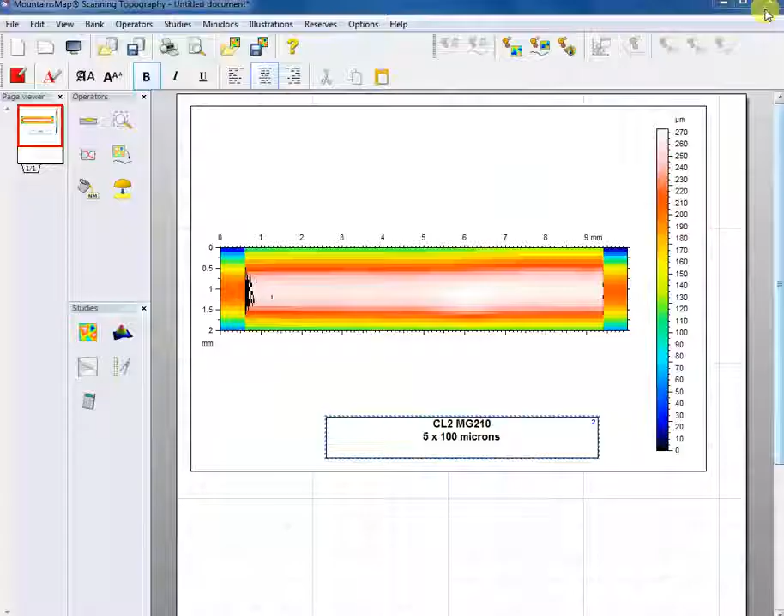It's a little difficult to get an actual thickness on this thinner material. So what we did is we put it across a tooling bar and we applied a little force to it so that when we scan across it, we can get that step height, which will tell us the thickness or the height of that material. So let's go ahead and walk through them.

Here's the first scan. And here you can see what we did is we scanned 10 millimeters by roughly 2 millimeters across that target. We took a data point every 5 microns along the X, and then we would jog it down 100 microns and take another scan. So that's why it looks a little stepped, because we only took a scan every 100 microns.

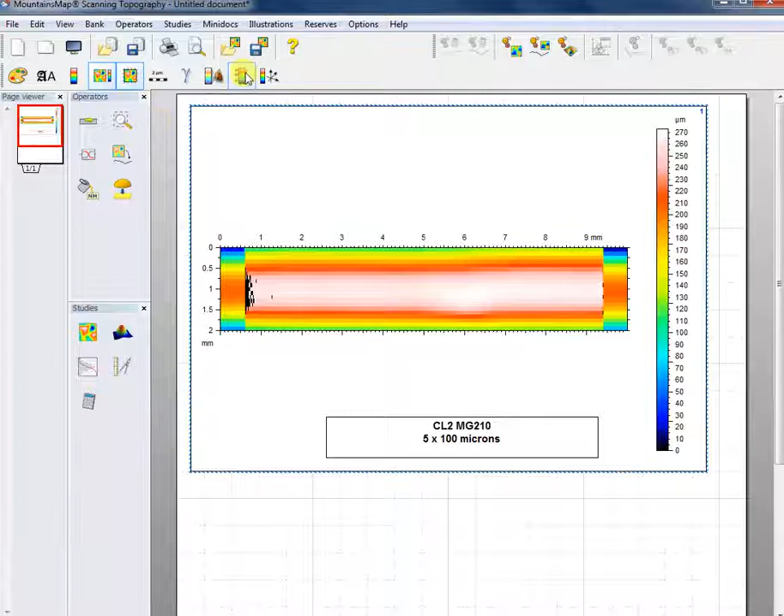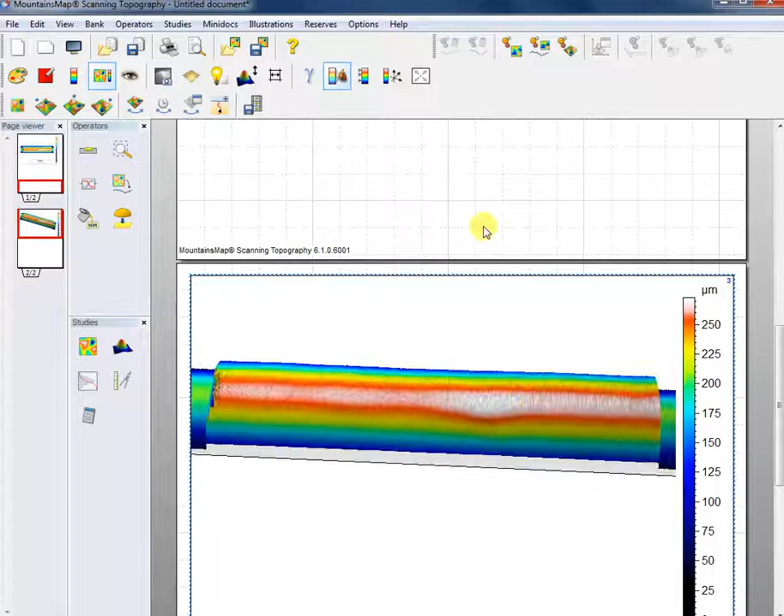So let's go ahead and take a quick look at this where we've optimized the color. And this is a 3D view of that. And let's just put a color scale on there so you can see. So you can tell that we're getting really good data. There's that step height. And if we come back to this, let's take a profile across it, pretty much at the dead top center.

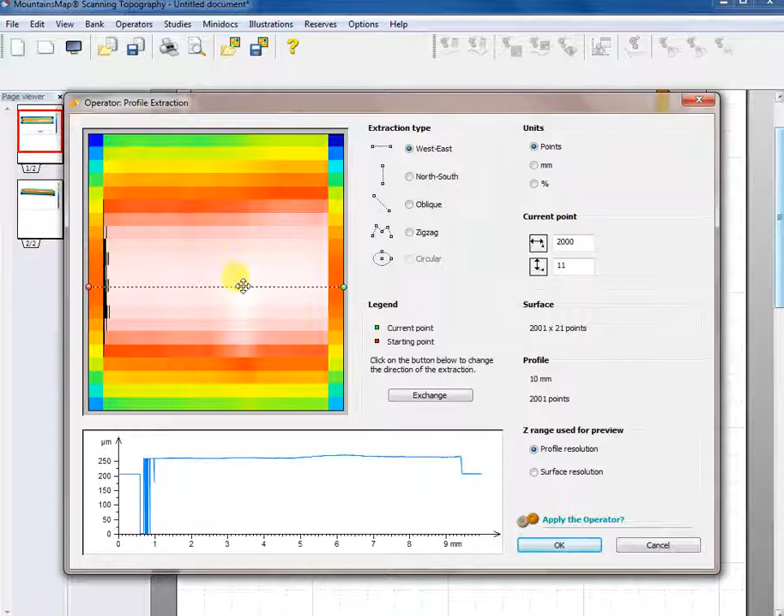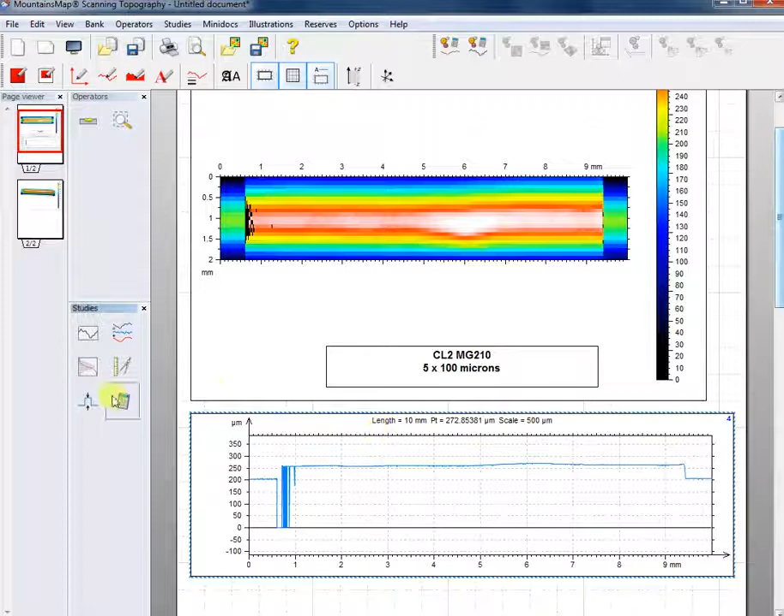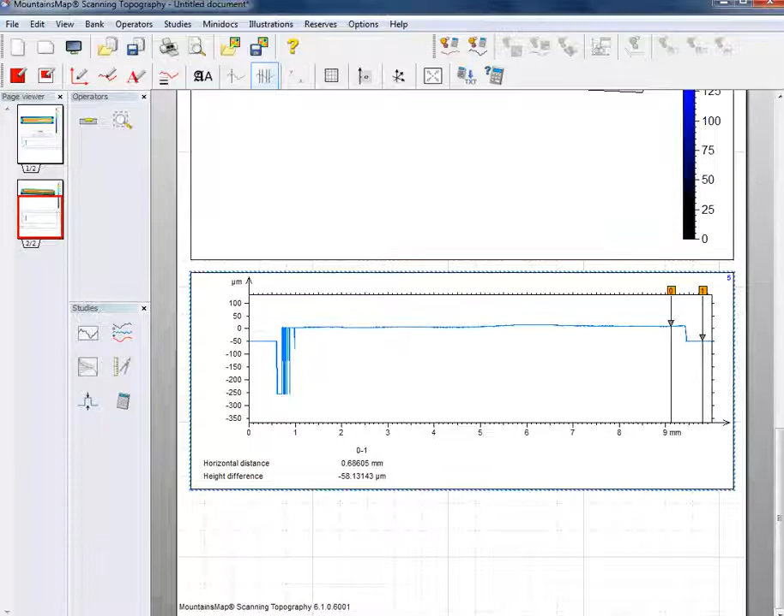And of course now we can see what that height is by doing some basic measurements. And as you can see, we have a little waviness in it. Not sure if that's from the fixture or the material. And so here we're saying there's a height difference of 58.131 microns from that step height. So this was the blue non-LM 2 mil target.

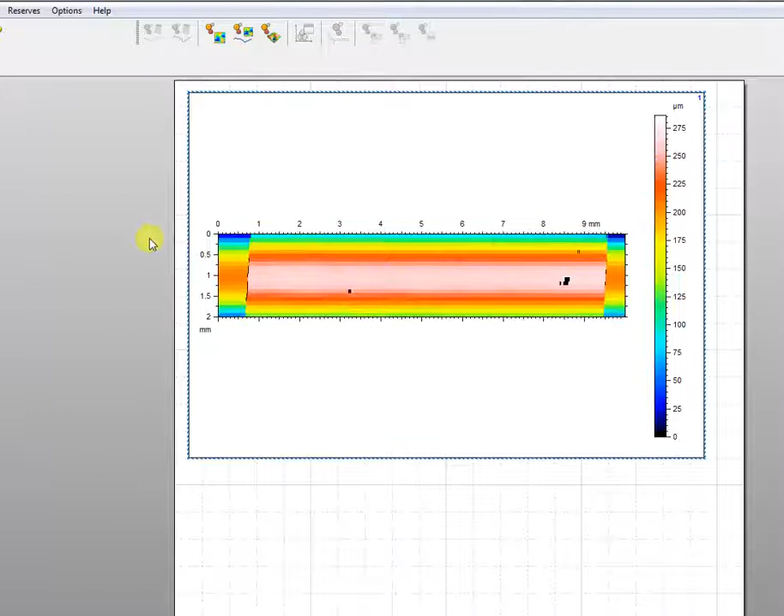That was 210, and let's take a look at 220. I'm just going to walk through these pretty quick, so you should be able to get a good idea of how these are performing. And once again, let's take a look at the same setups. As you can see, it gives you a really good feel for the resolution and the accuracy of the CL2 probes.

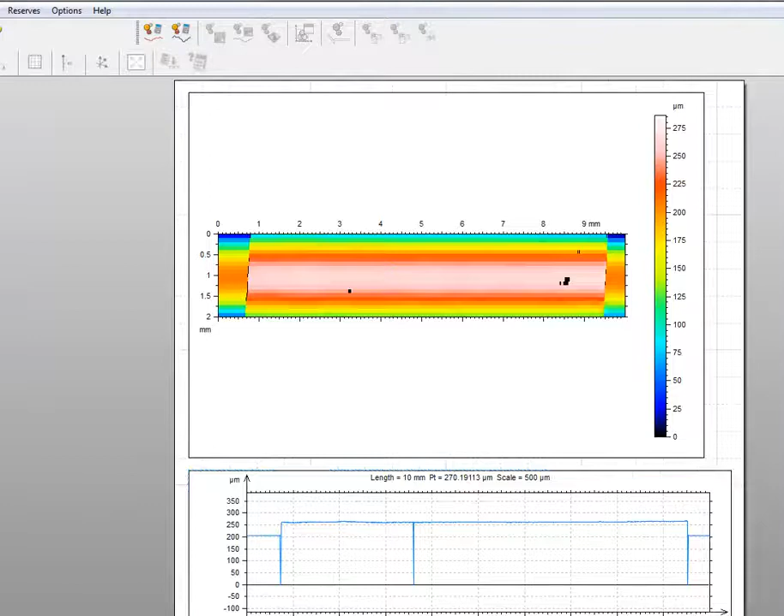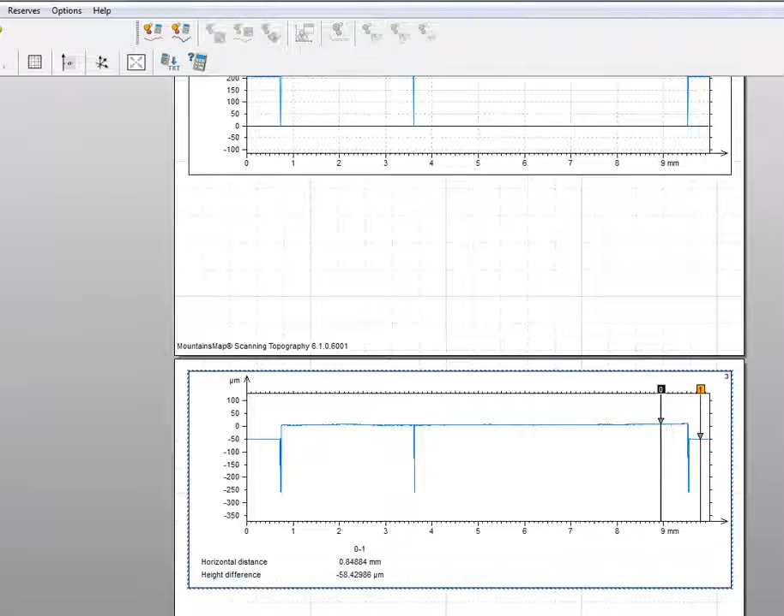And let's take a measurement of this also. And so you can see at this side we're about 55, and here we're at about 58 microns. So that gives you a good idea. It is possible with these tools that we could come in here and level it a little bit more using some software. And once again, that will give us a better feel for that step height or the thickness of it.

Now I'm showing 54.489, and as I move it across to this side, I'm at 50.17. So still a couple microns. And from this side to this side, it's 60. It's also possible that we can zoom this up so you can get a better idea of what this surface is looking like. And this scale is from roughly -2 to 1.5 microns, or that's tenths of thousandths.

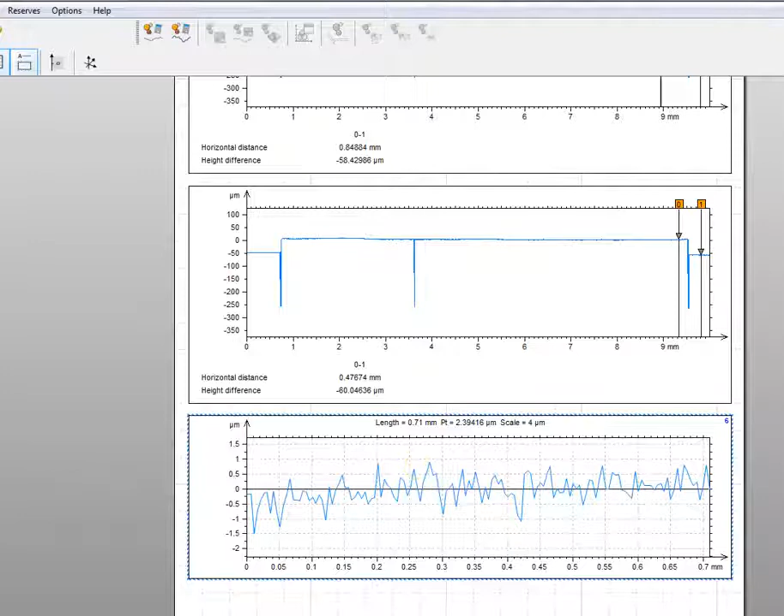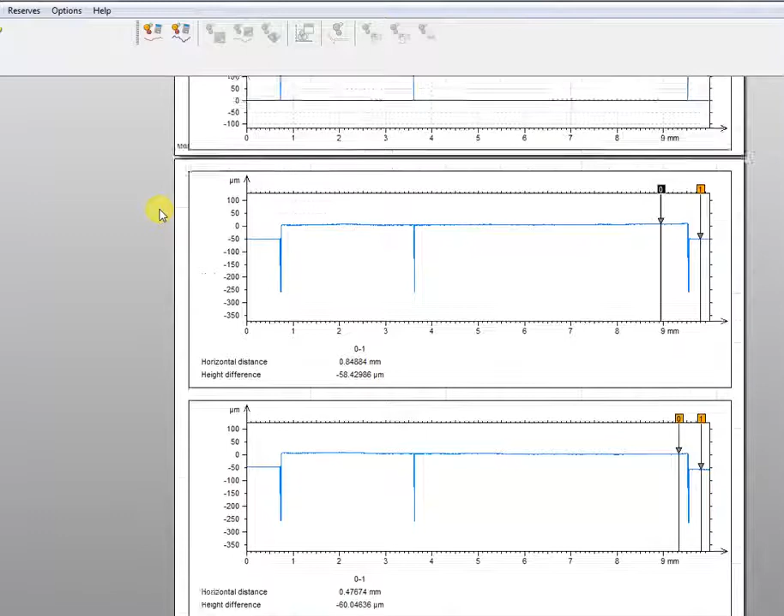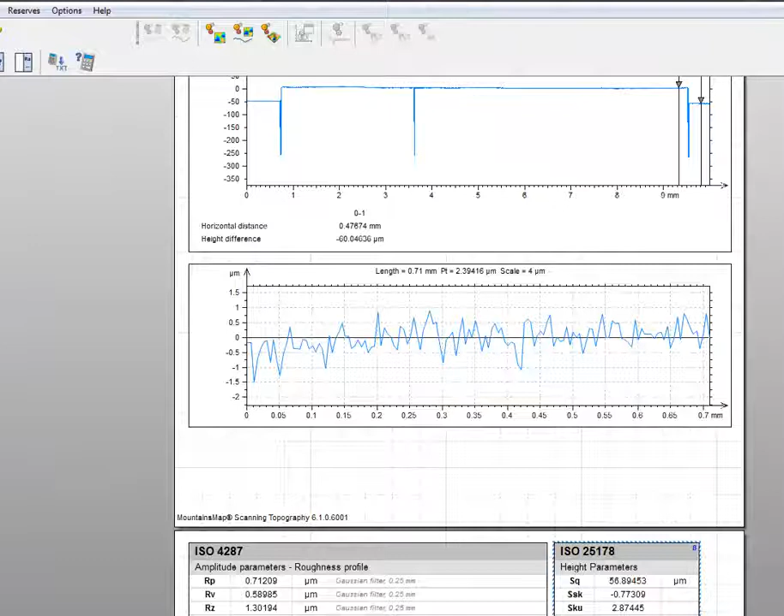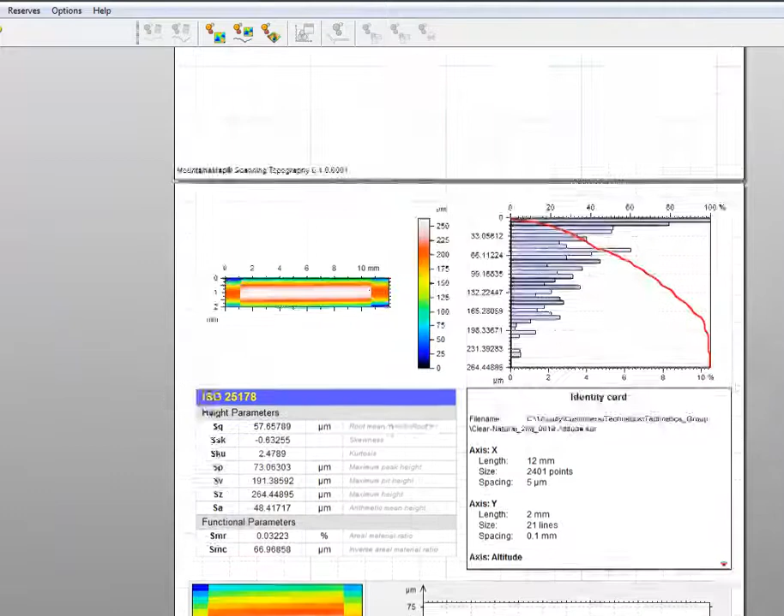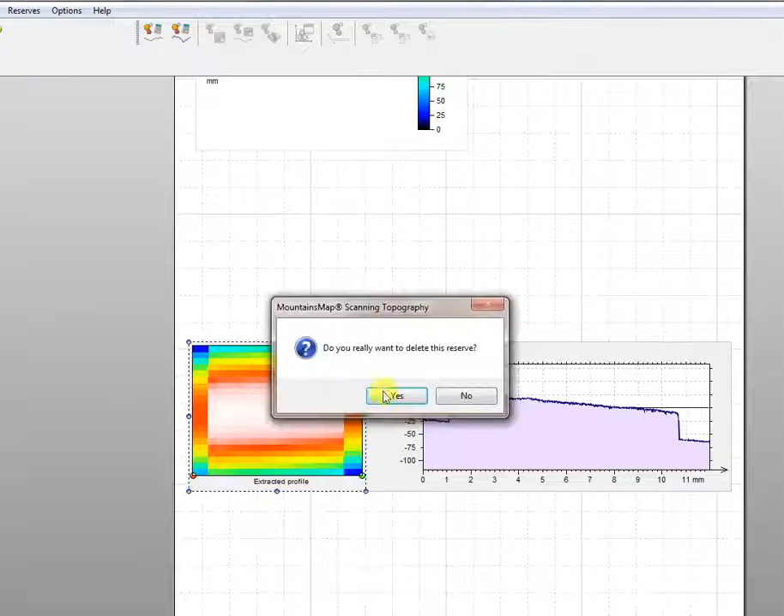Let's take a look at the clear natural. And let me just clean up some of these templates. And here at 48 is the surface area, so much smoother it appears to be than that first target. And once again, let's just come across, and you can see most of these are going to look pretty similar. So what this is really showing us is that with the white light confocal, we're not going to have any problem with color or material or transparency.

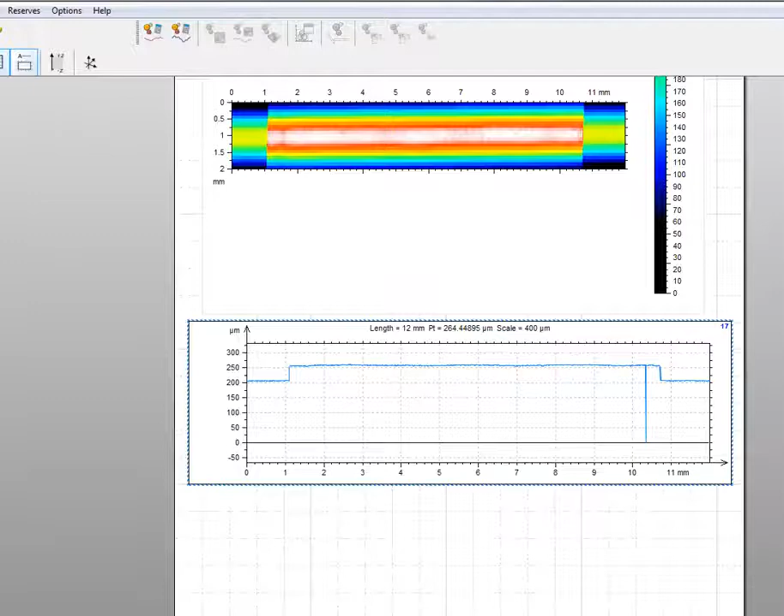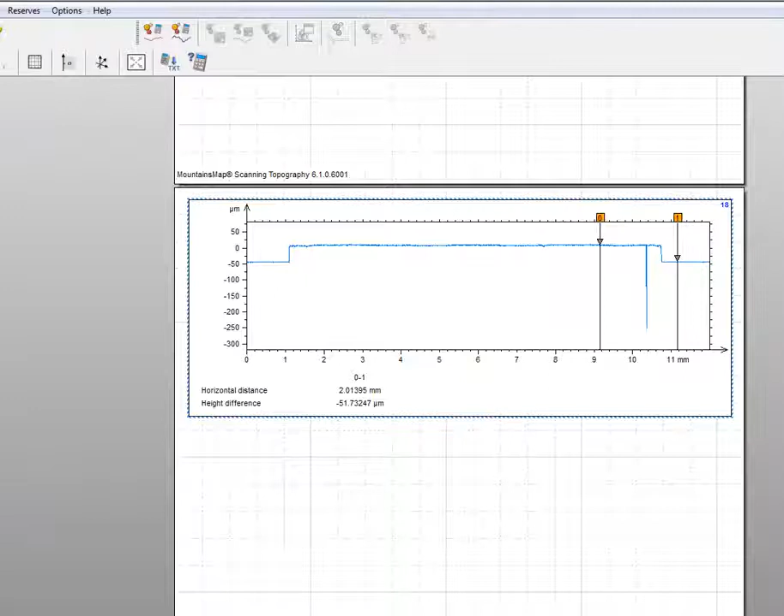And so we're showing about 52 microns. And you can see it's pretty level. We're down to 355 nanometers from the tooling rod to the tooling rod. And so here I'm showing it as I scroll across here, about 52 microns. So that was the clears.

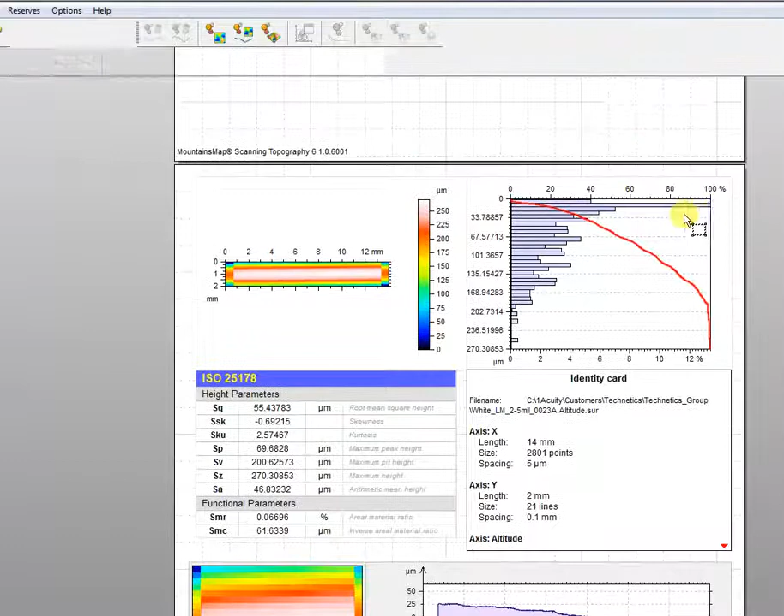Let's take a look at one of the white. As you can see, we have done a lot of scans on these materials, and we'd be happy to do more. But just for the sake of going through them a little quicker, I think you'll see that we're getting a good feel for being able to measure any of these targets without any problems. About 46 microns for the Sa.

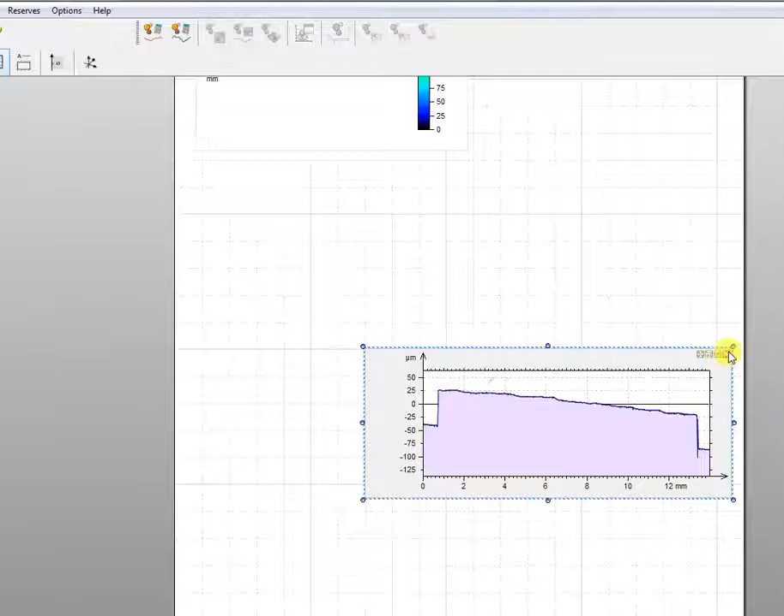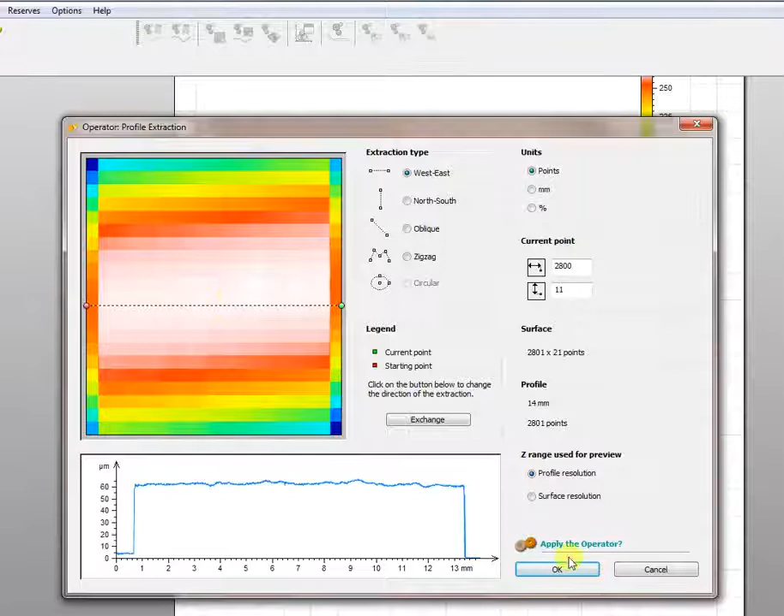Once again, let's zoom that up. And let's look at the profile across there. And as you can see, as we move it, on the further edges, we're not flat against that tooling bar, and so it tends to shift a little bit.

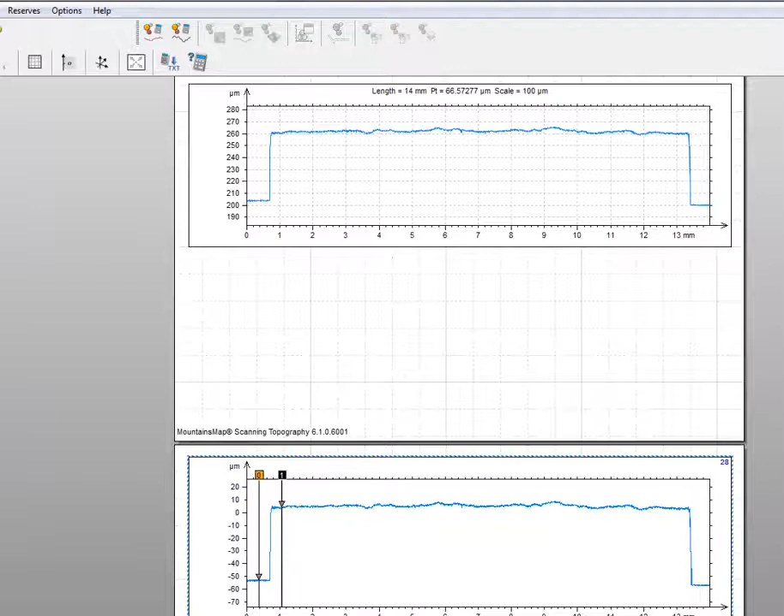And once again, if we come in here, 57 microns, and you can see this surface is quite a bit rougher. It's doing 3, 4, 5 microns, and up to here 62. And let's just zoom this up real quick and take a look at that. So here you can see peak to peak, we definitely have over plus or minus 2 microns.

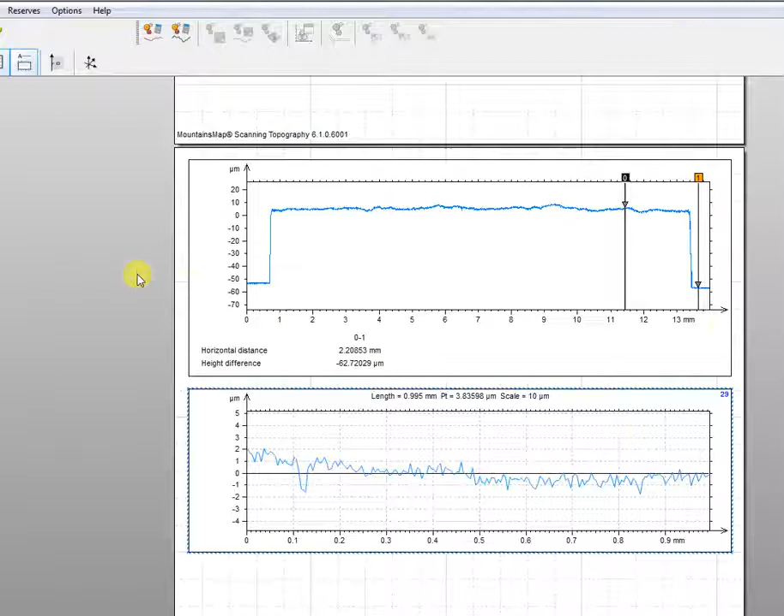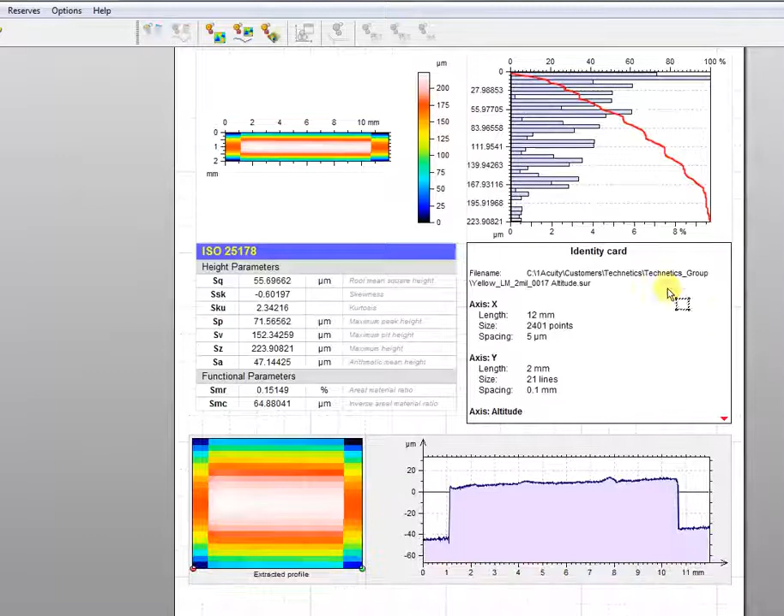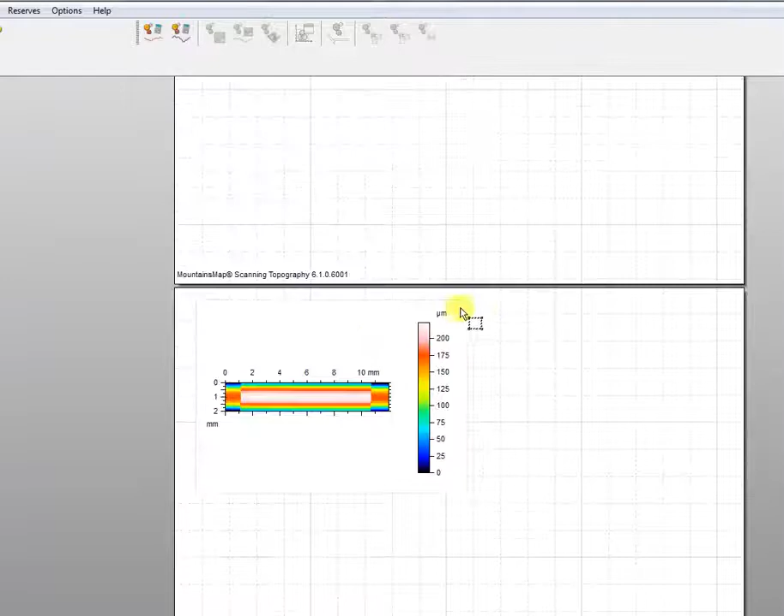And let's do the last one, a yellow. I see that we have an LM, and I'm not quite sure what the nomenclature is, but as you can see, we're not having any problems with the surface or the textures. Our Sa is about 47. And so there's that surface. And once again, we have it in 3D.

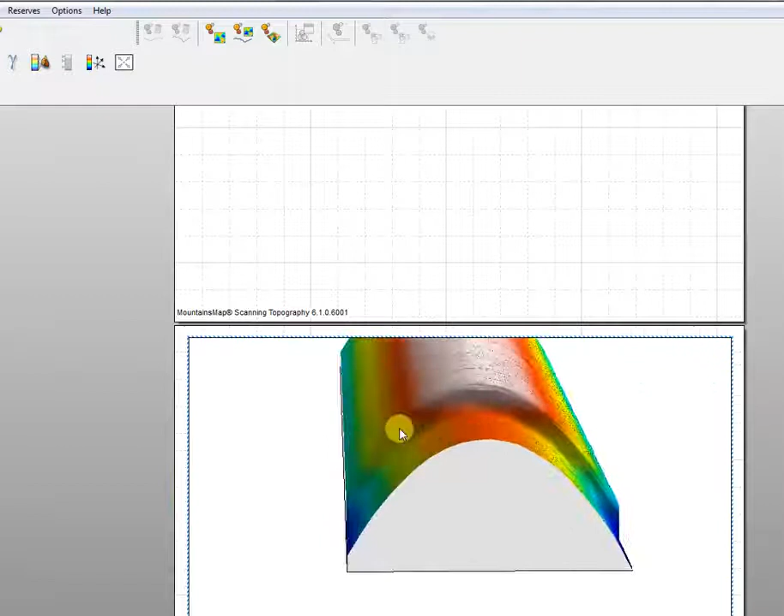And you can sort of get a better feel for it; we're seeing all those edges really well on this surface. And you can see the sort of striations across here that we're able to pick up. So let's go back and do a profile across the top dead center.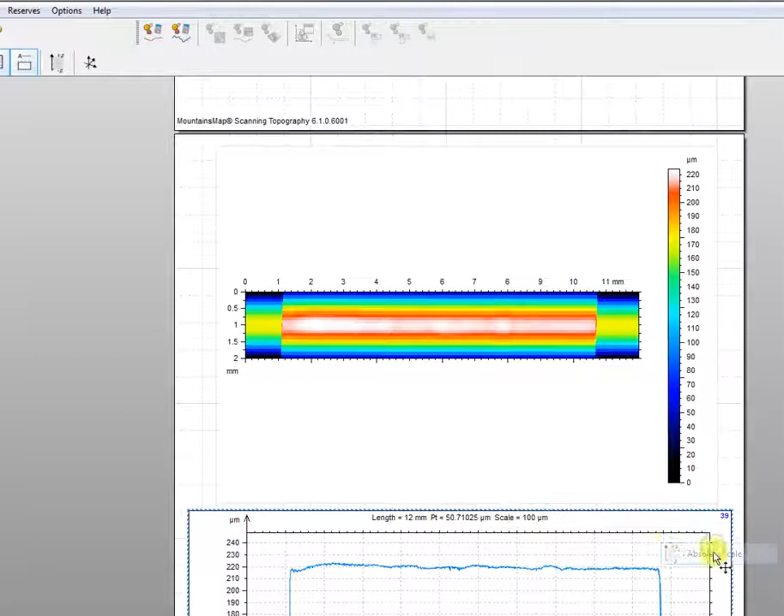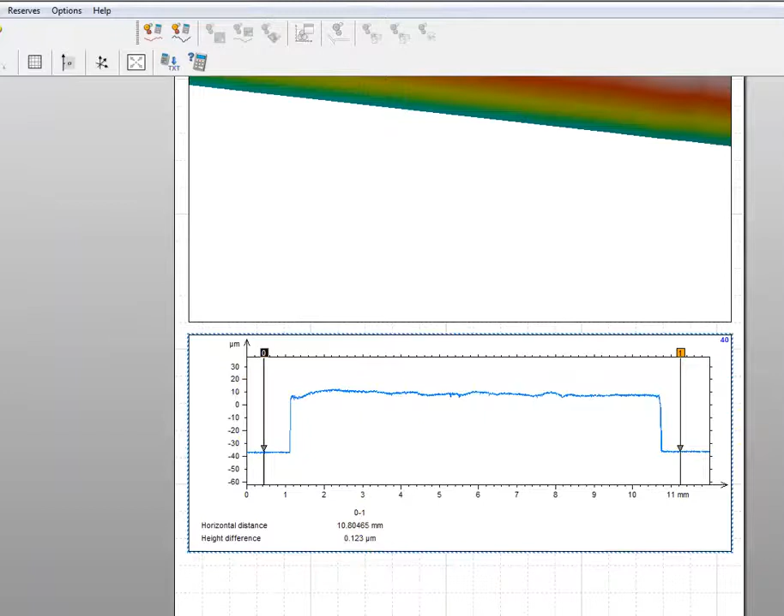And once again, it appears right here there's a little low spot of about 44. And we're in that 48, 45. And you can see it definitely has some features on it. It's a little smoother here. And once again, if you look at the rod, we're within 123 nanometers of being level. So definitely doing the job on the target and on the surface of this material.